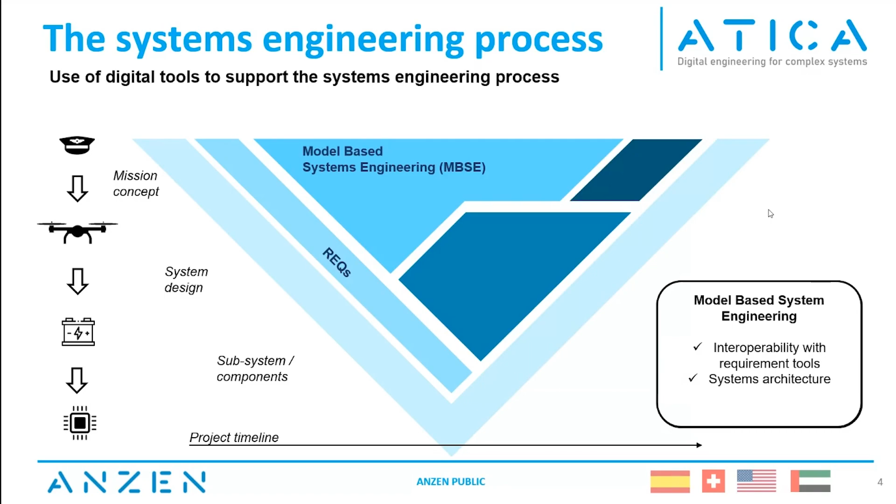And in the last few years, and of course, if you are here with Capella, you are already familiar with these frameworks. But what we will want is to link the requirements with system architectures and to develop these system architectures in the model-based system engineering tools in order to find new requirements that are applicable at lower layers of our system engineering process. At some points, the model might be so detailed that it can support simulation, and also in some cases, more advanced analysis or even code generation.

In this case, we are talking about model-based design. There are specific tools for that, and sometimes it could be also interconnected with model-based system engineering. In some cases, these models are so detailed that they can support what is now called digital twin, a virtual representation of the system that represents from, let's say, different points of view, the behavior of the final system that we are developing in the projects.

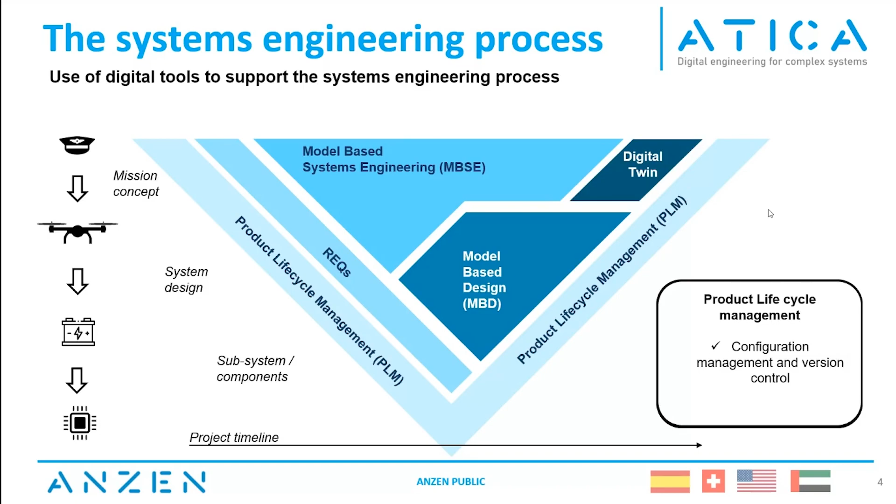And all these tools and methods and tasks are supported by other tools that are used to just manage interactions between the different frameworks, and in particular manage versions or control the development process of these very complex products.

So our vision in Anzen is to put model-based safety analysis as an additional tool in the middle of all these ones, with the main idea of centralizing information, being able to share safety-related information across the different disciplines that we have presented just before, and being able also to make analysis as smooth as possible, in some cases even automatic, if we have, let's say, the correct tools and the correct source of information all interconnected. So this is the vision that we are seeing in Anzen, and this is what keeps us working all the time.

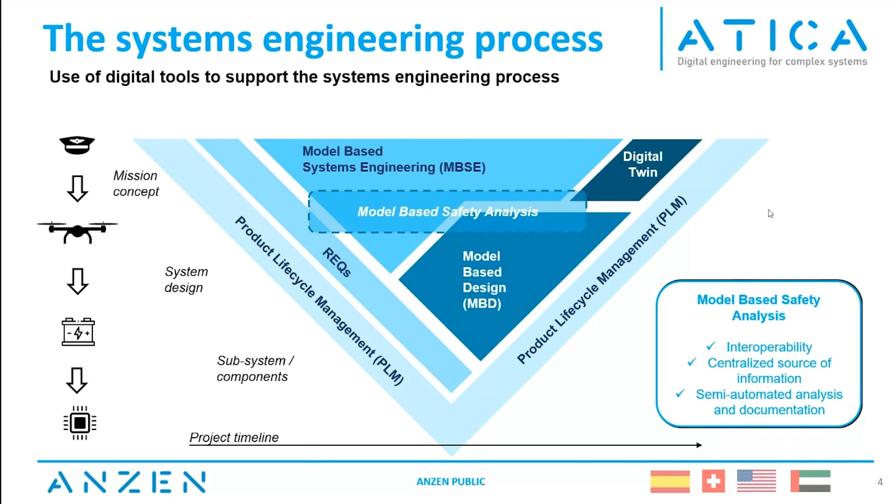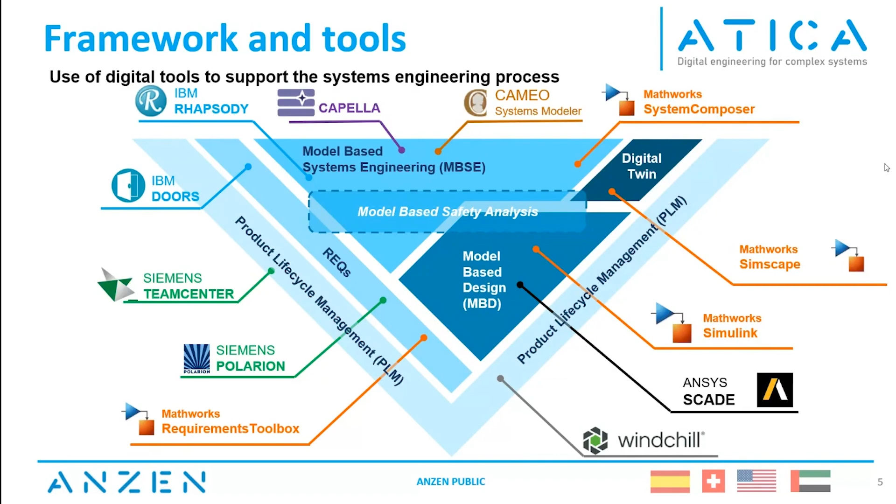We want this model-based safety analysis to be a sort of transversal tool that benefits all these engineering disciplines all over the product lifecycle. So just to present with a little bit more detail what we are talking about, I have put together this slide with different tools that you might be using already. Of course, there is Capella, which is the main one and the one that we will be talking more about today. But our idea is that ATICA is not something that is constrained to Capella, but rather transversal and could benefit all the different disciplines.

So our vision is to develop safety extensions that allow us to manage safety-related information. When I say safety, I mean safety and dependability, or safety, availability, reliability, and maintainability. Everything that is around, let's say, the correct functioning of a system and the mitigation of failures in case they occur. So we want ATICA to be able to interoperate with requirement management tools in order to have specific safety requirement libraries for complex products.

We want ATICA to be compatible with model-based system engineering, and this is the main focus of today, ATICA model-based safety analysis. We want ATICA as well to be compatible with model-based design tools, and in particular, we found very interesting applications in automatic systems and systems that are capable to detect failures and reconfigure by themselves. And we want ATICA, of course, to be compatible with digital twins in the future.

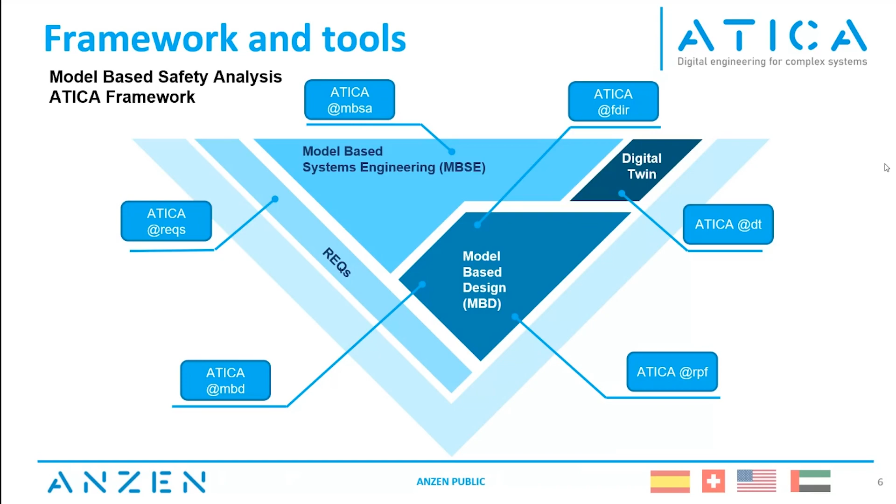So being able to create a framework that allows us to introduce failures into very complex virtual representations of systems and evaluate contingency scenarios and response of the system against failures. But this is more like the long-term vision. Today, we are talking about ATICA model-based safety analysis, and in particular, ATICA for Capella. We have other developments ongoing. In particular, we are trying to couple with other tools that are widely used in the industry. But today, we will focus on ATICA for Capella.

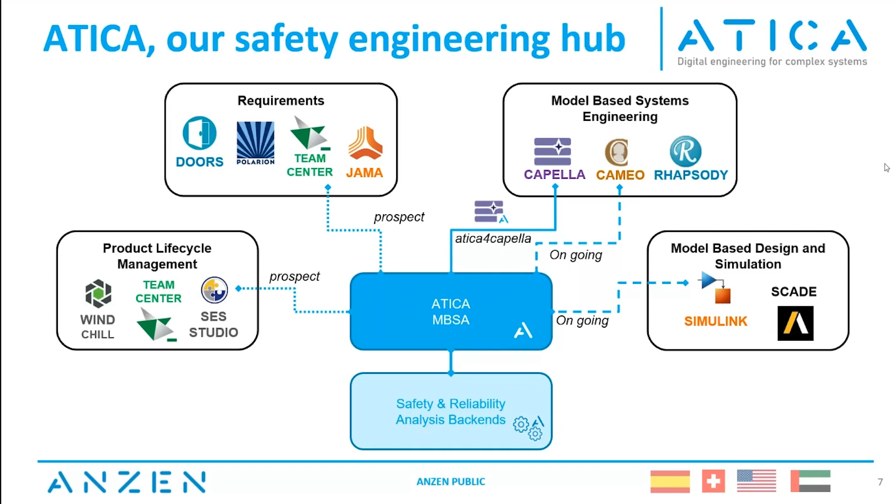So after this brief presentation with the main ideas of our vision, let's jump now into ATICA for Capella, and more importantly, what does this add-on do? So in this slide, I'm going to break down the system engineering process into three main perspectives. One is requirements. The other one is model-based system engineering, which will be supported by the Arcadia methodology. And the third one is the model-based safety analysis, in this case supported by the ATICA framework that we are developing.

So it all starts with an idea of a mission, or what we call stakeholder needs. Somebody wants a system to do something. Let's picture that we have an aircraft here.

The mission is to move people from A to B or something like that. And from this need, we are going to develop different layers of analysis, starting from operational analysis, and then this will help identifying functional requirements and eventually building our system analysis with all the system architecture. These concepts are very general, and if you're familiar with Capella, of course, you already know.

What we want is to have a third perspective, which is the model-based safety analysis, that is going to take information from operational analysis in order to identify under which framework this system should be certified. If you are familiar with the aeronautic industry, you will easily recognize here the EASA rules, CS23 or CS25, or now in the advanced air mobility field, we are talking about the SORA analysis. So these kinds of regulations tell you what your system needs to comply with in order to be allowed to fly in specific circumstances. So it's very linked to operational analysis.

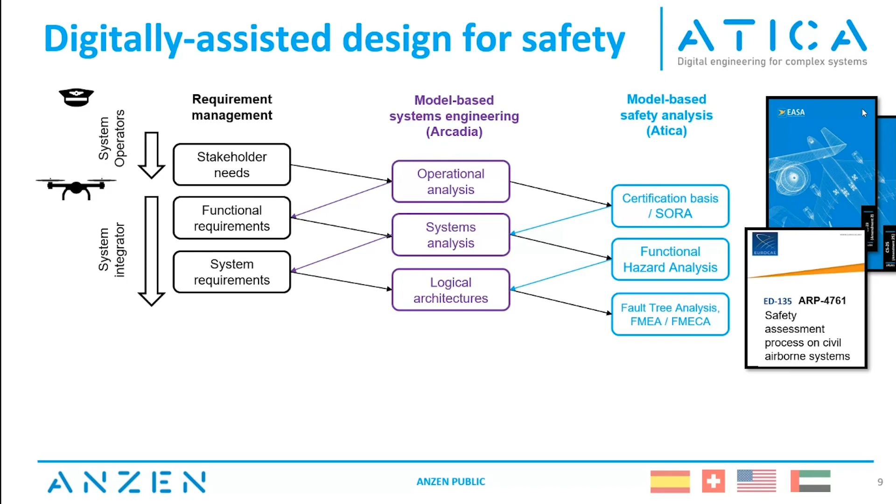Breaking down the system into more detailed, let's say, subsystems or components, we are going to find eventually our logical architectures, and we are going to have, from the model-based safety analysis perspective, the conventional analysis, so typically fault tree analysis, FMEA and FMECA. And in particular, in the aeronautic industry, we are doing this analysis following the ARP 4761 regulation. This could also be tailored eventually to other frameworks, in particular automotive with their ISO regulation, or in space, the ECSS. This is something that we are looking forward to doing in the future. For now, what we are covering is the regulation of the aeronautic industry.

And continuing with a more detailed view of our system, we can break down the logical architectures and finish with what we call physical architecture in Arcadia, which is also sometimes called implementation. So the view that presents already the physical system. When I say physical, I mean sometimes there is physical hardware, but sometimes there is also the software part. But it represents really the implementation of the system, how the system will be built in order to meet the system analysis prescription and the operational analysis that have been identified before.

And here in the model-based safety analysis, since we already have a detailed representation of our system and we know which subsystems, which components we are using in the system, we can finish, let's say, our process with the reliability prediction. So this time we have not only generic functional components, but physical components that sometimes have their own failure rates, and that we can propagate depending on the architectures and find the overall reliability of the system.

So this layer on the right, certification, functional hazard analysis, fault tree analysis, reliability, what we want with the model-based safety analysis framework is to have, let's say, an interconnected or holistic view that allows us to share information from one layer to another, and more importantly, couple this information with the system information that is already covered in the Arcadia methodology, in the model-based system engineering tool.

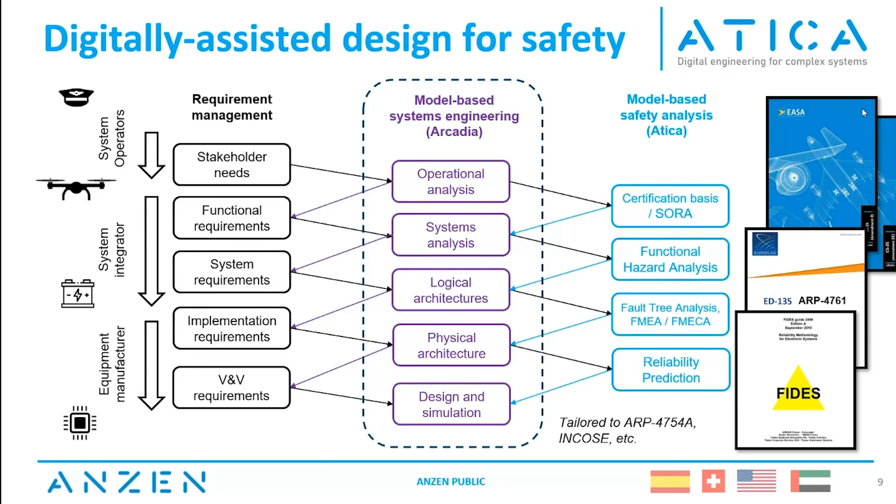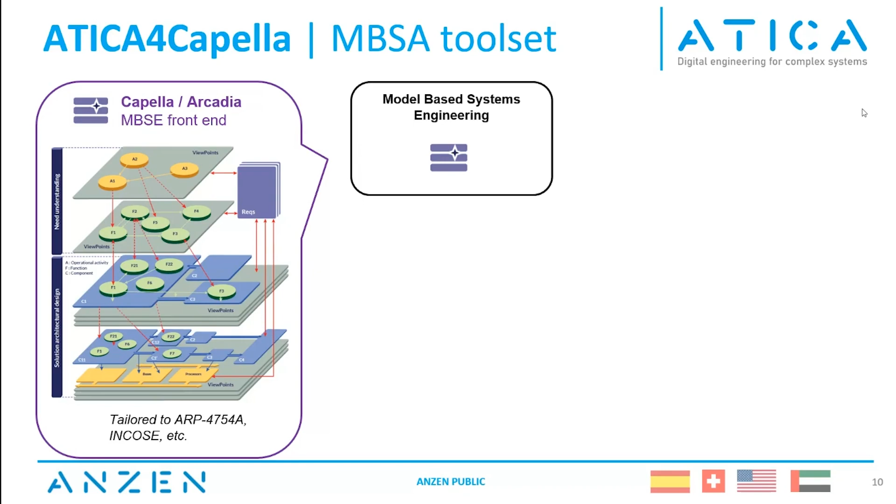So now, how is this implemented in Capella? We have Capella as the main tool for doing the system engineering process, and we have an extension, an add-on that brings two additional layers. One is a viewpoint, which allows including new models into the system. You will see it in just a couple of slides, our safety meta model and the new objects that are included in this model. And then we have the safety and reliability analysis backends.

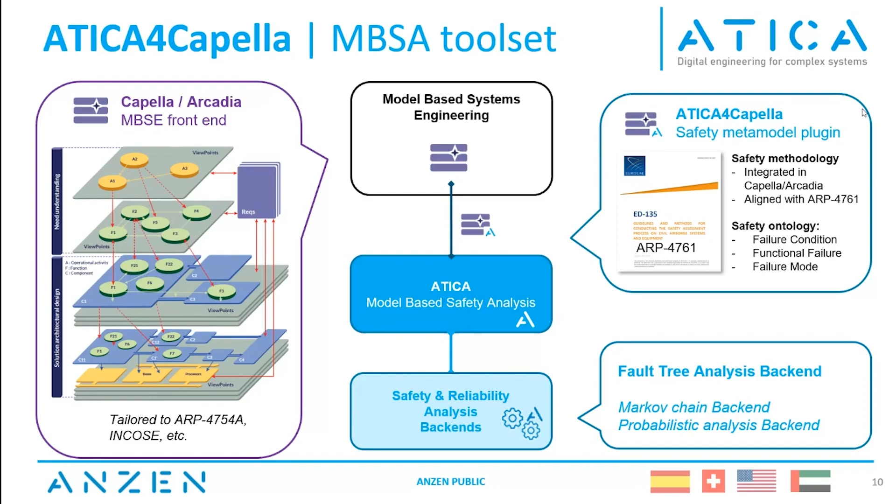This is something that runs outside of Capella, but connected, which interprets the system model, propagates failures and eventually does the kinds of analysis that are needed, like fault tree analysis or Markov chains or probabilistic analysis. This is work ongoing. We are implementing this little by little, but I'm looking forward to presenting to you the main functionalities that we cover so far.

So just to give a brief presentation of the add-on, ATICA for Capella. For now, it's working mainly for Capella 6 and Capella 6.1. We started the development directly in Capella 6. After some feedback from different users, we saw that it was also important to cover Capella 5.2. So right now, if you try to download it, you will have the option to download the version for 5.2 or the version that covers Capella 6 and 6.1.

We have not decided yet if we will continue covering both versions. We will try to merge as soon as possible. But for now, just for the users that want to have a first insight into the tool, both versions are available. We are also trying to make ATICA for Capella as compatible as possible with other add-ons. We have already successfully tested the requirement viewpoint and the document generation add-on M2Doc.

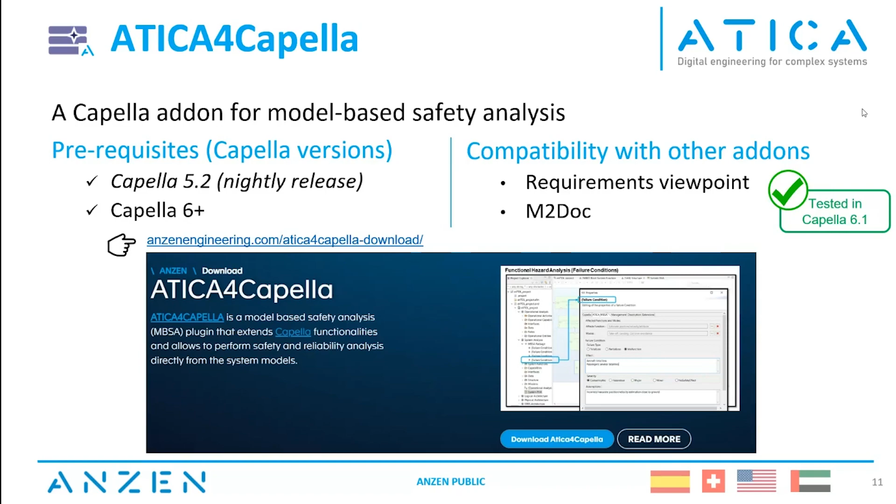So now a few words about the safety meta model and the new objects that we are introducing. So you are familiar with the Arcadia methodology, and you know already that systems can contain system functions. The new element that we are bringing is failure condition, which is an element that could be linked to a system function and that is used to describe which will be the effect in case the system function fails and what will be the severity of that failure. So this allows to classify the system functions by layers of severity, and we will see afterwards how this will be important in lower layers of the analysis.

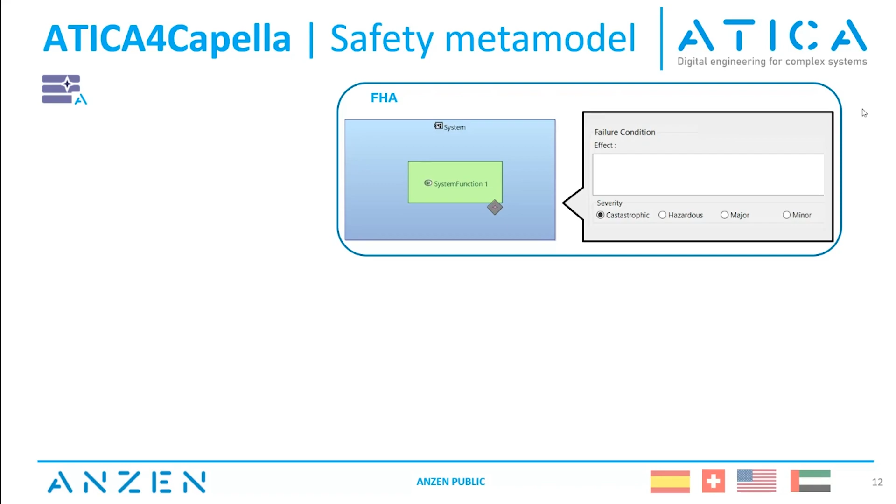Thanks to this new object, failure condition, and the interrelationship between system function and failure condition, we are able to do the functional hazard analysis, the first one of the analysis that we want to cover with model-based safety analysis. Then, in the Arcadia methodology, system functions can be derived into logical functions, and this logical function will have also a failure representation. In this case, we call it functional failure. And it also has its own properties in order to define the consequences of these failures.

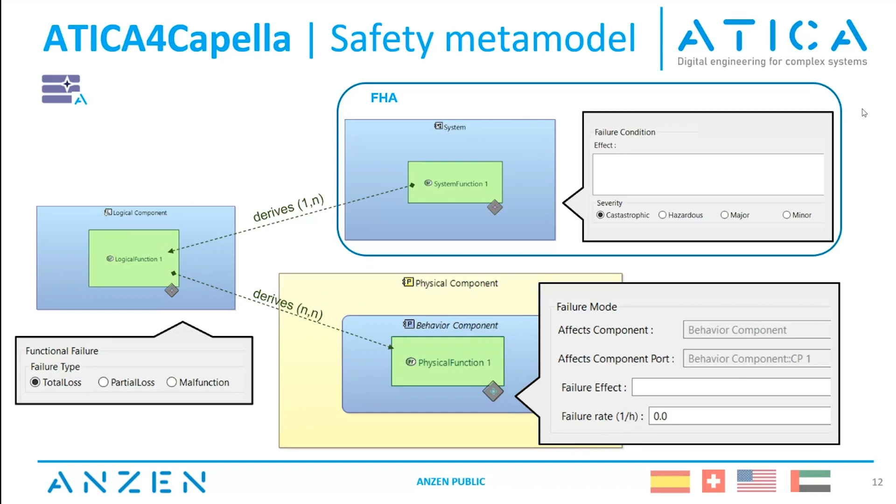And again, at physical level, we are doing the same. So we are linking a new object, failure mode, to the behavior component and also to the physical function in order to have full traceability of failures and being able to describe from the safety perspective the same way that we are doing in system engineering, so breaking down system into logical and then into physical. We will be able to break down a failure condition into multiple functional failures and eventually into multiple failure modes. So this helps us doing top-down analysis, such as the fault tree analysis.

The fault tree, for those who are not familiar, is used to see which will be the effect of a failure at higher levels of our system. So for instance, we have a failure condition. We have identified that losing this system function is catastrophic. Then we will see which are the different triggers that could affect this failure. And we can verify the probabilities of occurrence of these failures at higher level, at system function level.

And we can also do functional failure modes and effect criticality analysis, FMECA, or the summary of these failure modes, which is FMES. So this is more a bottom-up approach. We start from the component. We define the different failure modes that affect the component, and we move this element to the higher levels of logical and system in order to assess the criticality of these elements.

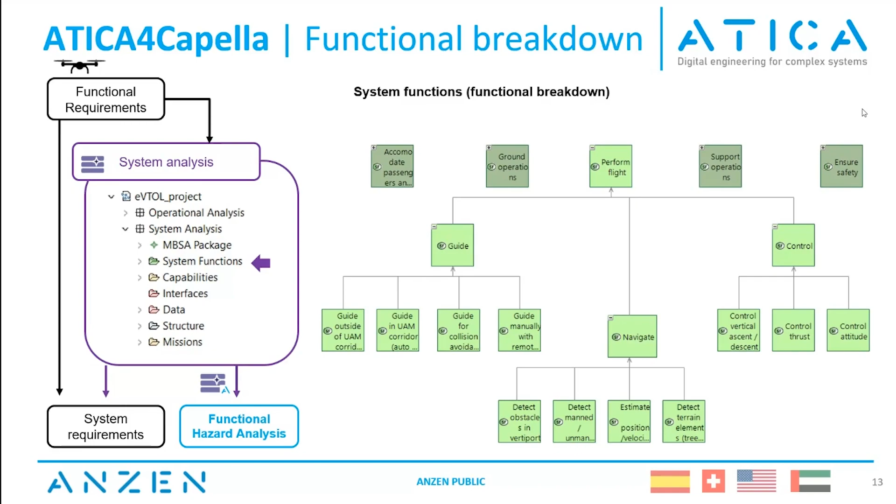So in order to run the model-based safety analysis, we need to start with a functional breakdown of our system, like the one you are seeing now in the slide. Just to present one functionality that I found very useful in combination with the generation of documentation is the option to create templates that generate automatic documentation from the model. We are implementing all these features because we have seen that most of our users really appreciate this possibility. So yes, we will dig a little bit deeper into this later on, but we are trying to do as much as possible, having the diagrams and then a template that allows to create the documentation directly from the different diagrams.

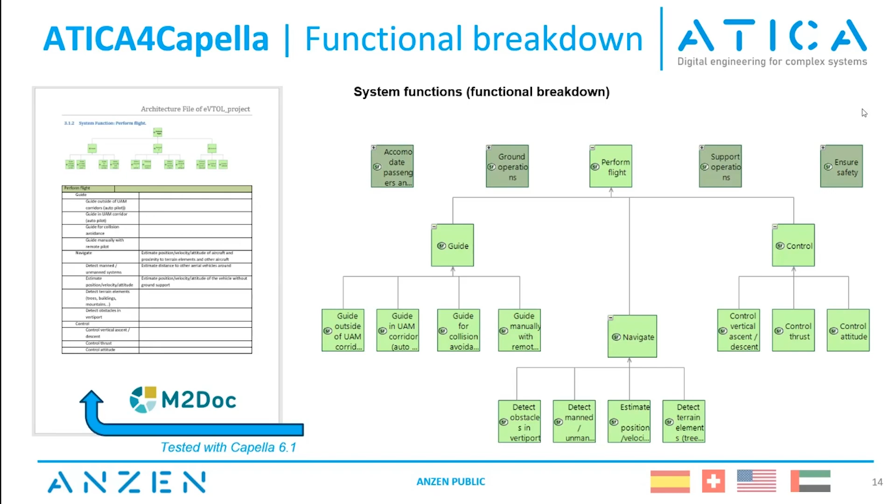So as I was saying, we start from the functional decomposition of the system, either in the functional breakdown or in a system architecture diagram. We create functional chains. Functional chains are important from the safety point of view because they allow us to identify what will be the effect of a failure and how it will propagate through the system.

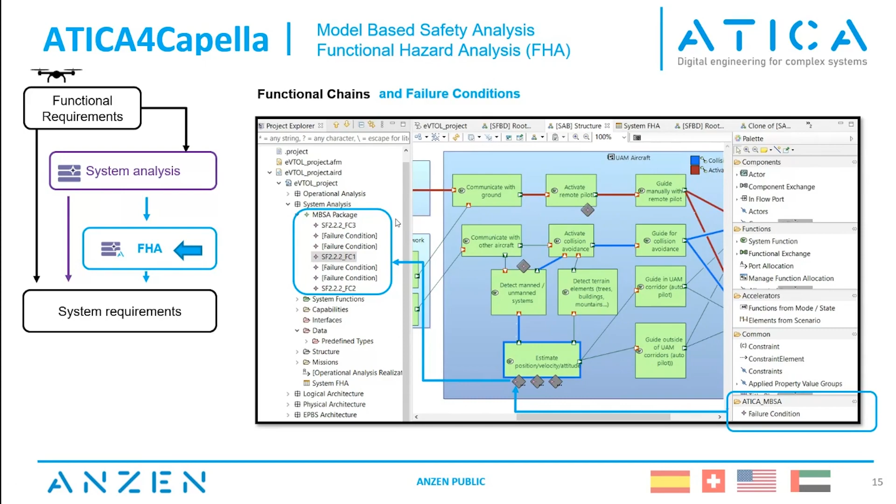And now, with our ATICA capabilities, we are able to define failure conditions. You see here on the right-hand side the failure condition element that could be linked to a system function, and then it's created automatically in the model tree, similarly to all the other elements that we have already in the Capella toolset. And then this failure condition has this dialog box that allows to bring more features and more information to the failure condition.

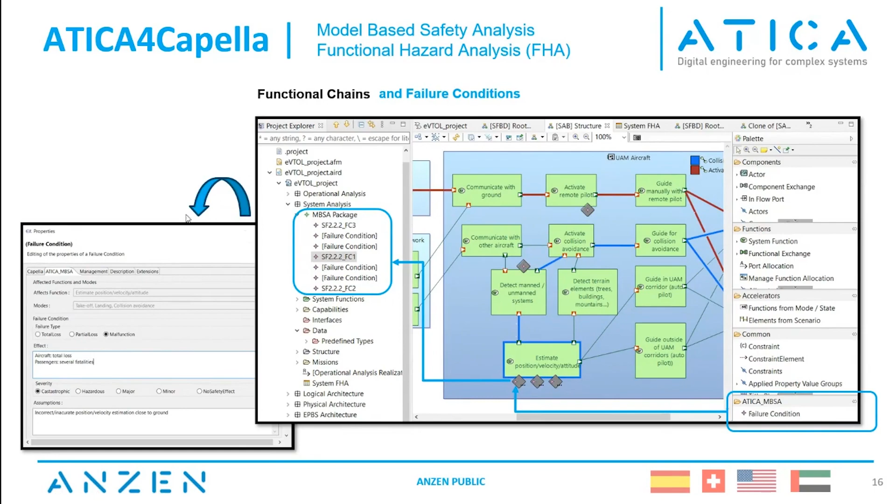We will see it later with a specific example, and more importantly, with a live demonstration with the Capella tool. And after we have defined a lot of these failure conditions and we have associated these failure conditions to our system functions, we can do the functional hazard analysis, which looks like this. It's a sort of table that classifies the failure conditions and summarizes the main features of this in an organized way, in a structured way.

In this case, we are following exactly the prescriptions of the ARP 4761, which classifies failure conditions first by the function which is affected, here in the green box, and then defines different features such as the flight phase in which this failure condition occurs, the effects of the failure condition, the severity classification, very importantly, because this is going to help setting quantitative requirements into our safety analysis, and then other fields to describe with more detail the failure condition itself.

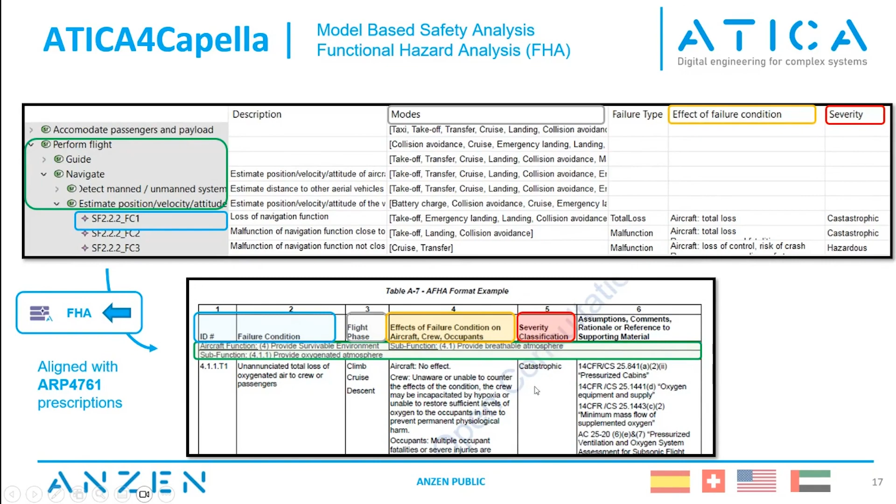And as I was saying before, we are always trying to be able to provide the functionality of generating documentation. So we have specific templates for this. And in combination with the M2Doc tool, we are able to generate, in this case, a Word representation of the functional hazard analysis.

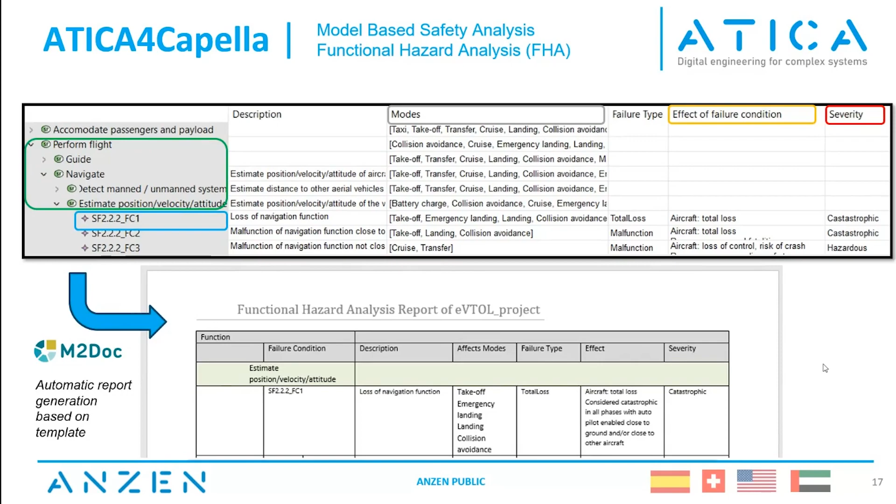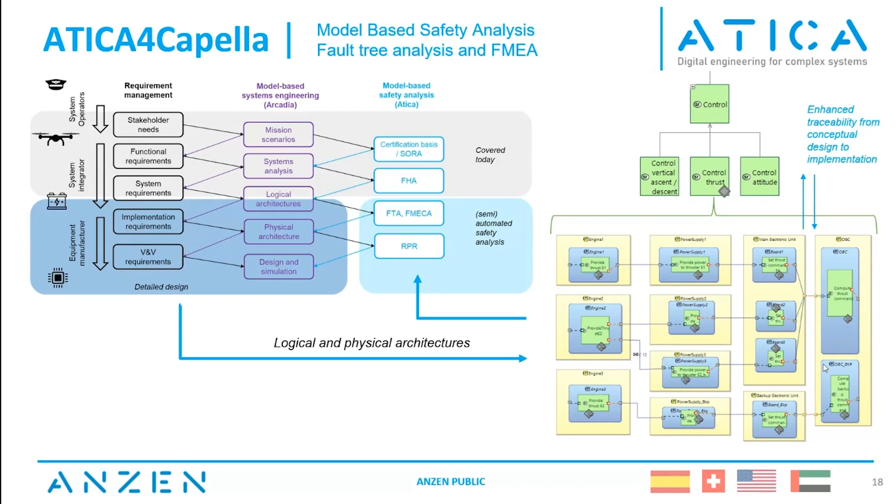This we will not cover today, but I want just to give you a little introduction to what's coming next. We have a plan to also implement the safety analysis at lower levels of our system analysis, in particular logical architecture and physical architecture, to be able to cover fault tree analysis and FMEA. But I will save this for later on. Let's now jump into a use case example.

In this case, we are going to do just a preliminary analysis of a system, an electrical vertical takeoff and landing vehicle. So we start, as we said before, with the stakeholder needs. In this case, there is someone that wants a vehicle to be autonomous, to fly with 4 passengers, to do vertical takeoff and landing, probably because they want to operate around cities. So it's quite convenient that it can take off and land vertically.

It's going to be moving around cities, and it's going to have, just to put some numerical requirements, a range and an autonomy. We need to know that there is some regulation about this kind of systems. For now, this regulation is under construction, but we already have some preliminary concept of operations that could be used as an input to develop our system analysis.

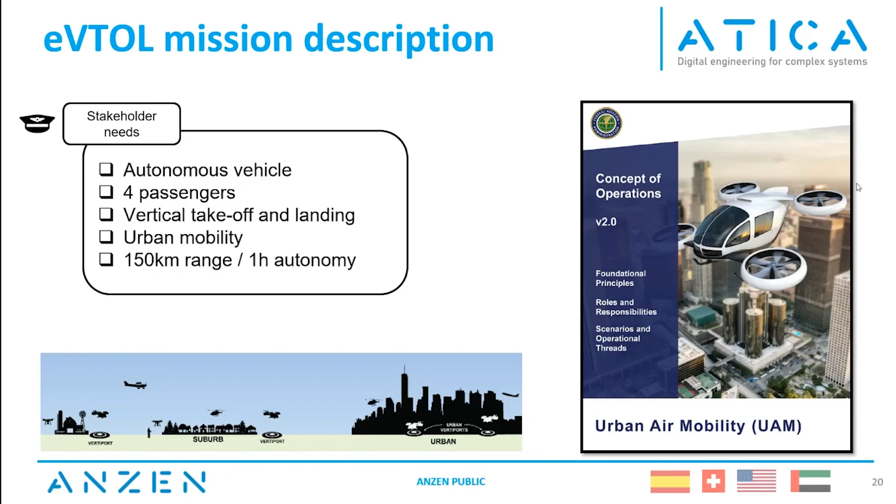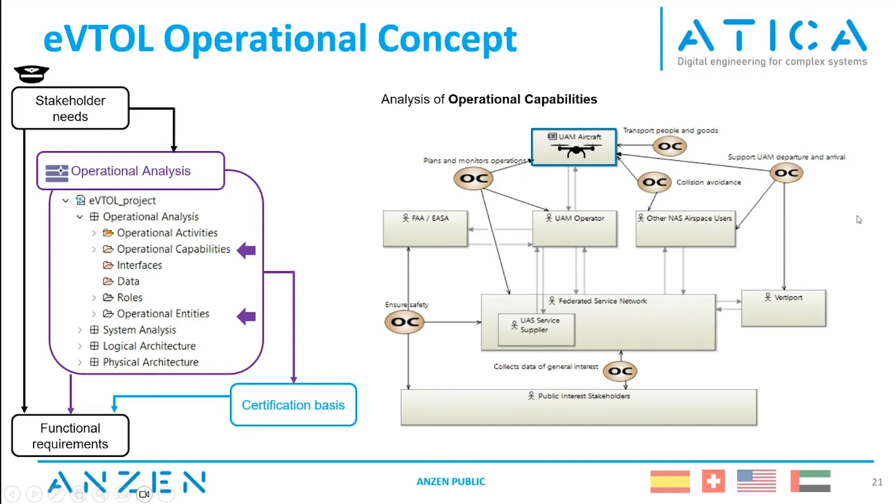So following the Arcadia methodology, we start the operational analysis by identifying the stakeholders that participate in our system, and more importantly, how our system of interest, in this case the vehicle, is interacting with other systems, which capabilities our system provides, and which of these capabilities also need the participation of one of the stakeholders. I'm not going to go into detail, but just to set the scene for what's coming next, we have our system of interest, our vertical takeoff and landing vehicle.

We define 2 main missions for it, the transportation of people and goods, and then, of course, ensuring safety. And we break down these missions into multiple capabilities, such as emergency landing or collision avoidance from a safety point of view. And for the transportation feature, we decided that we will need capabilities such as autonomous flight, communication with ground, and vertical takeoff and landing.

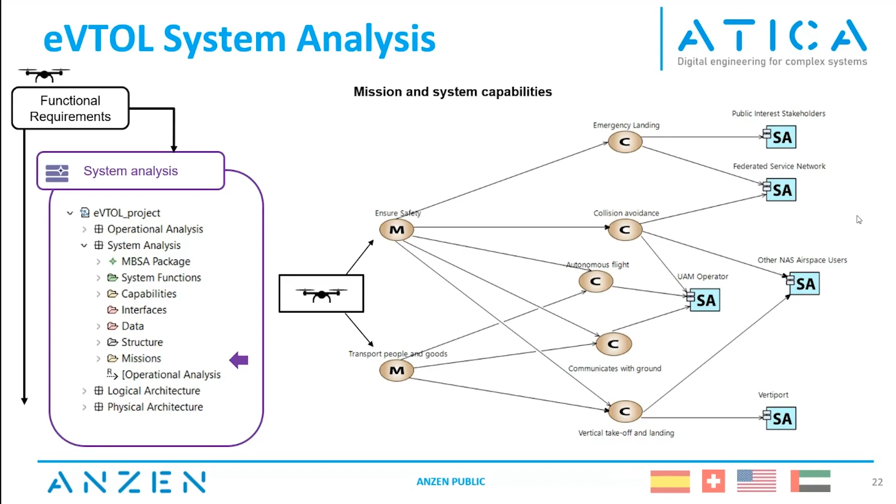And we need some stakeholders involved in the loop. In this case, you see, for instance, for emergency landing, probably we need support from the police or the firefighters. For the communication with ground, we need some ground infrastructure that also sends messages to other operators of the airspace. So all this is defined in the operational analysis, and then with more detail in the system analysis.

We can define a mode diagram. In this case, we represented in gray and blue the nominal modes of the system. So this system can be on ground, which is the taxi phase, can charge batteries, and eventually can take off. From taking off to finding the route that it is going to follow to reach destination, there is a transfer phase, which is mainly the ascent phase.

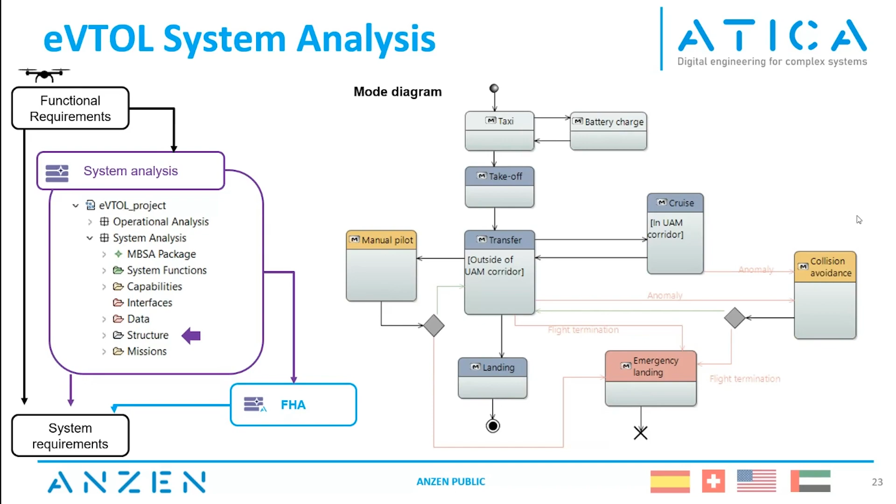Eventually, it's going to join an urban air mobility corridor, which is a sort of street, but defined in the air. It's going to fly there for a few minutes, and then eventually will be close enough to the destination point to take the transfer phase again, and then land at destination. But there are a number of things that could go wrong during this process. And we also have some contingency modes that allow us to take control of the system and do some safety mitigation action that prevents the system from having, let's say, a catastrophic landing on ground.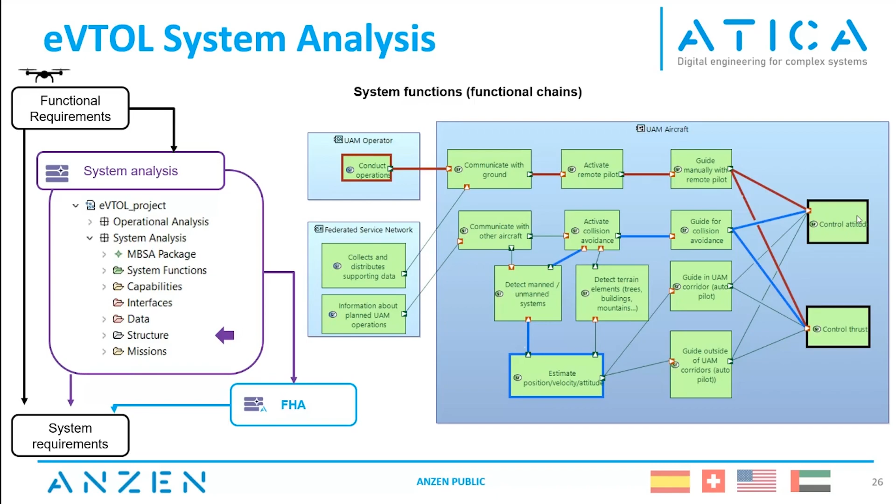We break down these modes into different functions, and we assign which of these functions are active per mode. So we may have nominal functions and other functions that are only active in contingency modes. I like a lot this functional tree representation, but it's also very useful to have the system architecture blank diagram with the different functions interconnected and the functional chains defined in order to identify how information is flowing from function to function in order to provide the capability that is represented by the functional chain.

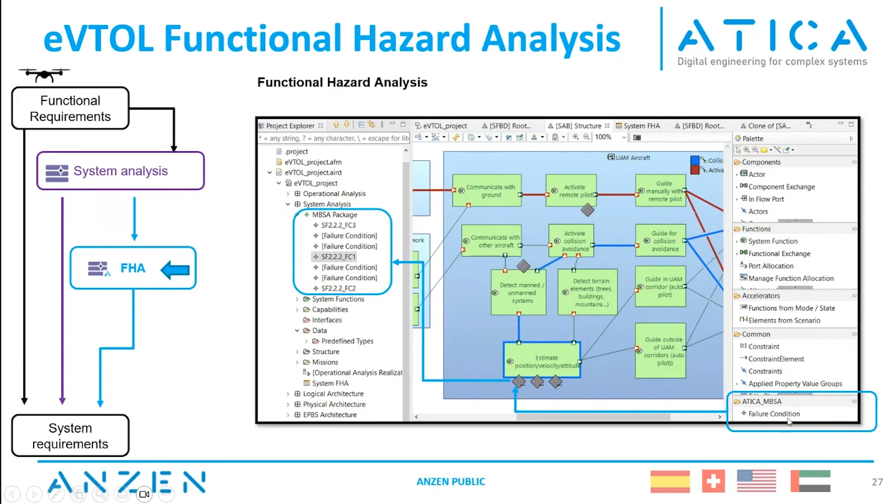So once we have reached this level, we are able now to start using ATICA for Capella, and in particular define our failure conditions. So as we have said before, we have the element failure condition here. We can drag and drop the failure condition to the system function and then start configuring the different fields that are needed in order to define this failure condition.

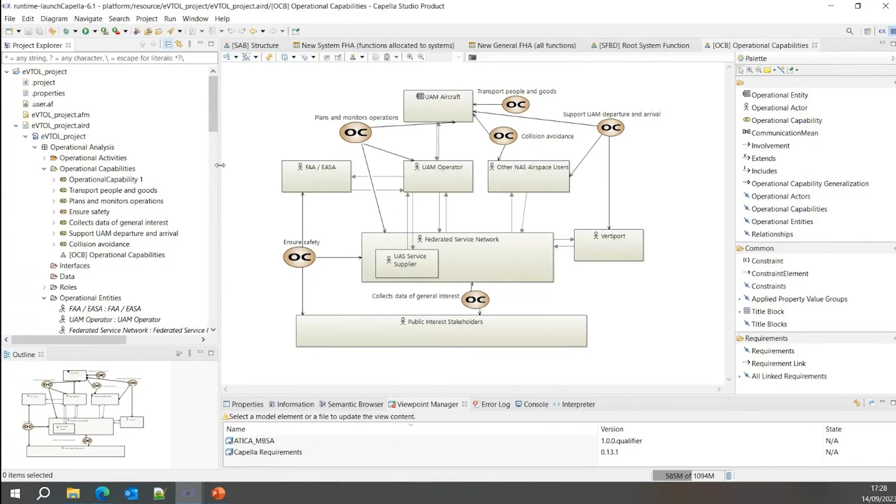So now I'm going to jump into the Capella framework. Now you should be seeing Capella. If you are not seeing Capella, please can somebody make a sign? But if there is no sign, I assume that you are all seeing Capella now. No, I confirm we can see. Thank you, Samuel. So now we see Capella.

We have the different diagrams that we have been talking about before. So I'm going to run a very quick new project just to show how to activate the plugin. But then we will come back to this example and run this example with more detail.

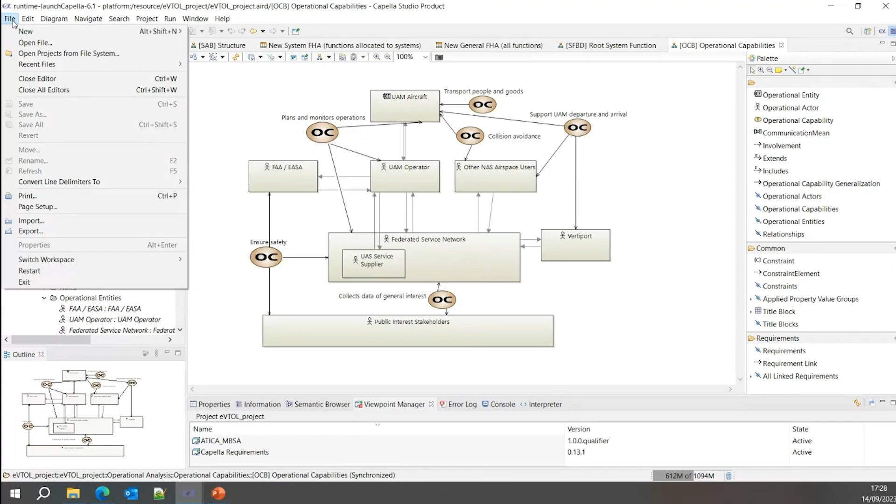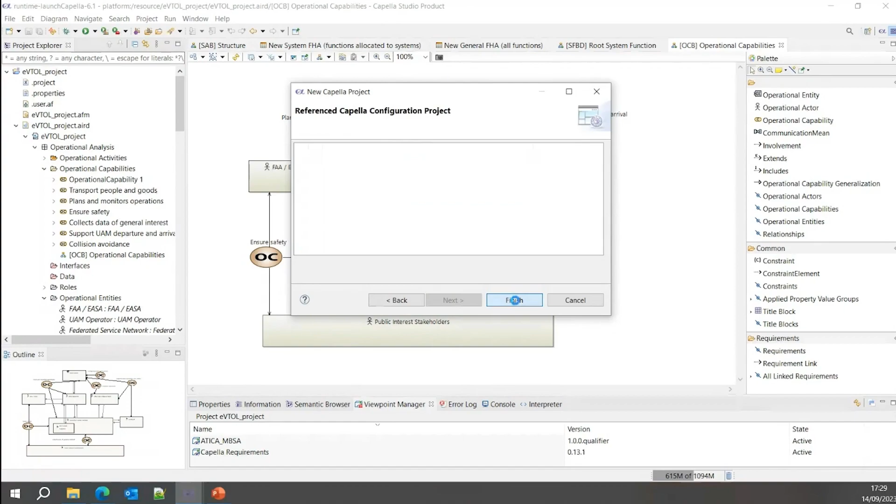So new project. For the sake of the representation, I'm going to call it just test. I'm going to activate all the different analyses. And I'm going to pick all the viewpoints, but not ATICA. You will see after why. I want to show you how to manually activate the plugin in case you have already a model created and you just want to use ATICA in combination with the model that you have already.

So now we need to go to Window, View, Viewpoint Manager. And here in the lower part of the screen, we see ATICA model-based safety analysis. We click on our project and we reference the ATICA MBSA. Now it's referenced. So now we have activated the new features that are present in ATICA.

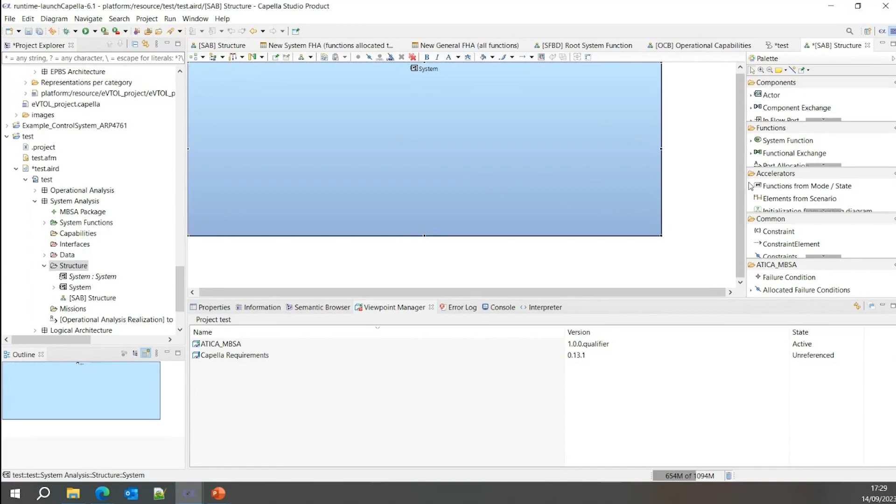The MBSA package appears here. All the different elements that we will create from now on are going to appear under the MBSA package. This way it is a structure in the project tree. I'm going to create a system architecture blank. Okay, now it's created. System, I can create a function. And I can create a failure condition associated to the function. This is a new feature.

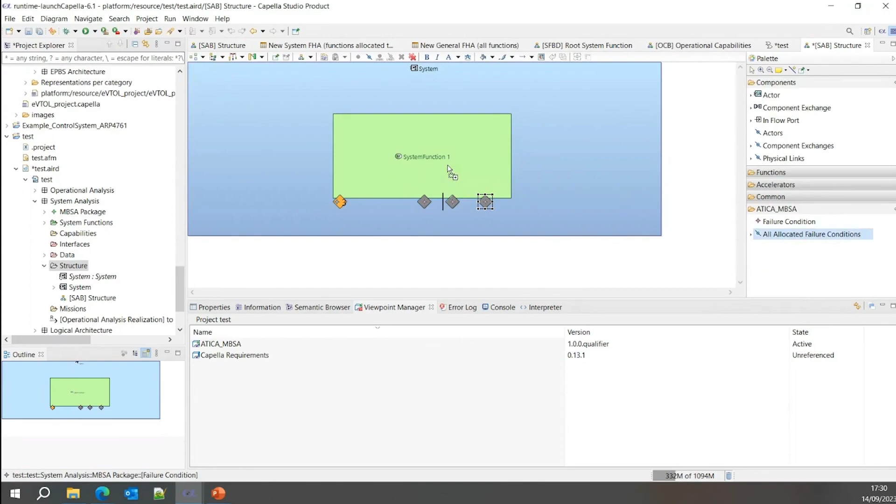It's something that we are consolidating right now, but roughly you have a failure condition and a counter. This is because for convenience, sometimes we may want to see the failure condition, and when there are many, you may prefer to just see the counter. So for now, I can create multiple of them and then pick if I prefer to see only the failure conditions or only the counter or just a few of the failure conditions if needed, similarly to what we are already covering in other parts of the Capella framework.

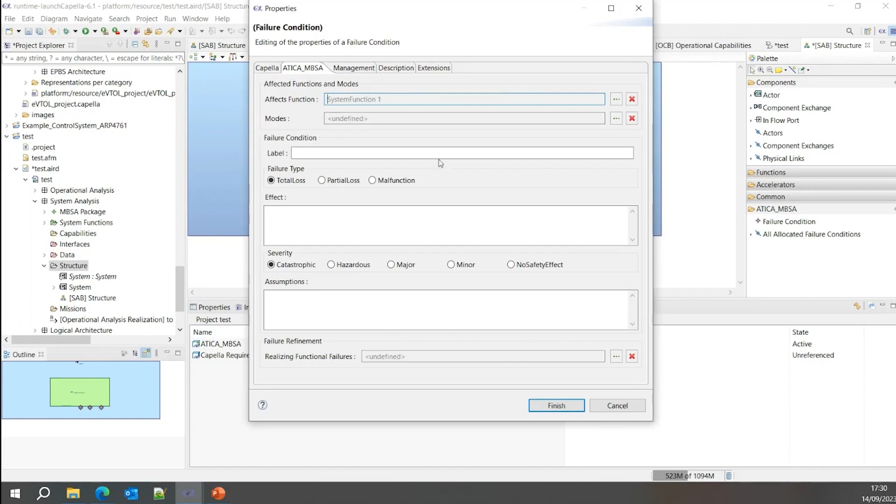We can go one by one to the failure conditions. The screen appears. We can create a name. And we have the different boxes that allow us to configure the failure condition, link it to the system function. This is automatically done because we have dragged and dropped the failure condition into one specific function. We can link it to modes. I'm not going to do it right now because this project is new and I haven't created any mode, but I will show you after in the vertical takeoff and landing example.

And here are different features that could be assigned to the failure condition: total loss, partial loss, malfunction, the severity, assumptions, effects. All of this can be completed manually. One important aspect is that for now, these fields are, let's say, fixed. It is not something that the user will be able to configure easily. We are exploring the option to define some configuration file that allows these fields to be configurable by the user. But for now, these are fixed.

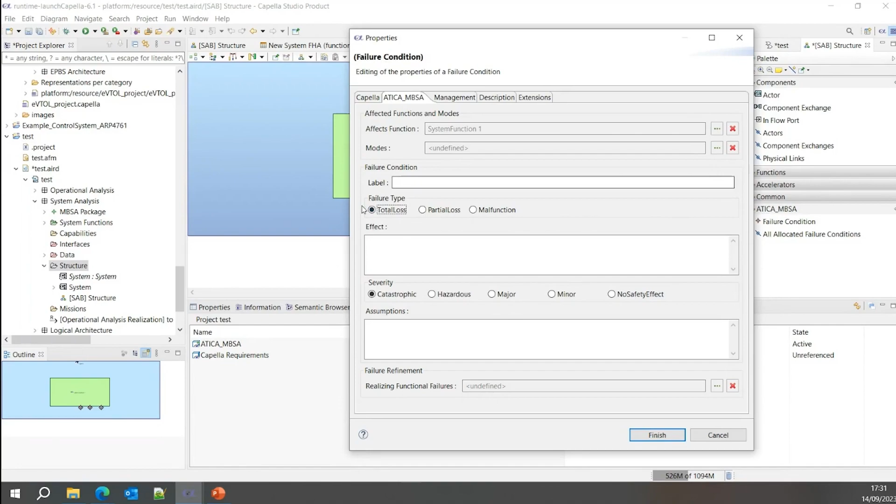So after showing you how to activate the plugin, I'm going to jump back to our vertical takeoff and landing vehicle. So we had our system. I'm going to open the system architecture blank.

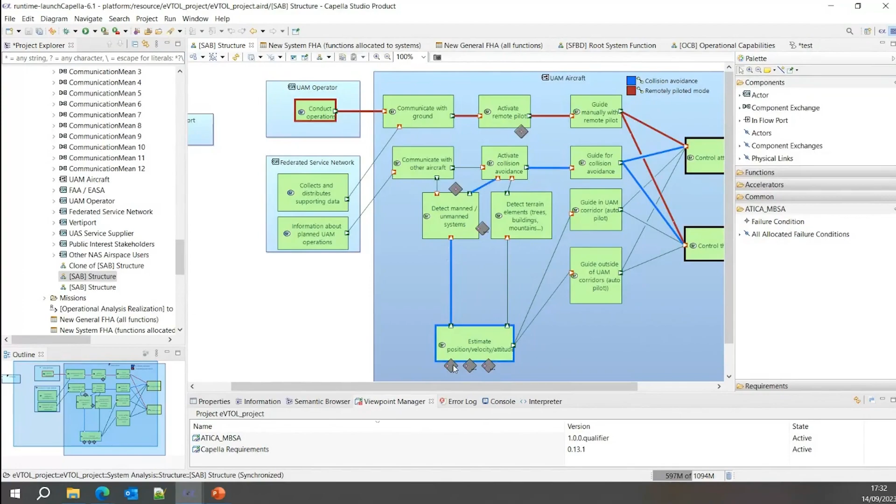So we have our system with functional chains, with multiple functions, with failure conditions associated to the function. It's not complete, but we have already a few failure conditions that have been associated to the different functions. And we can continue populating our system by putting more failure conditions into the functions.

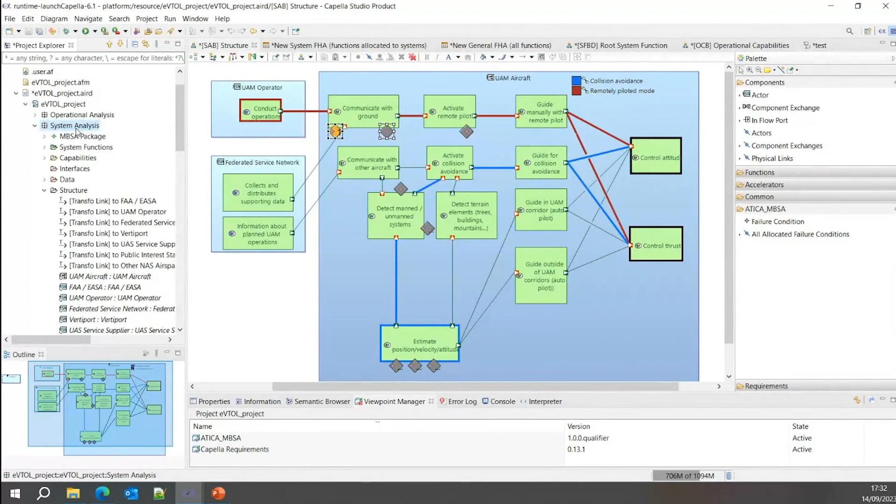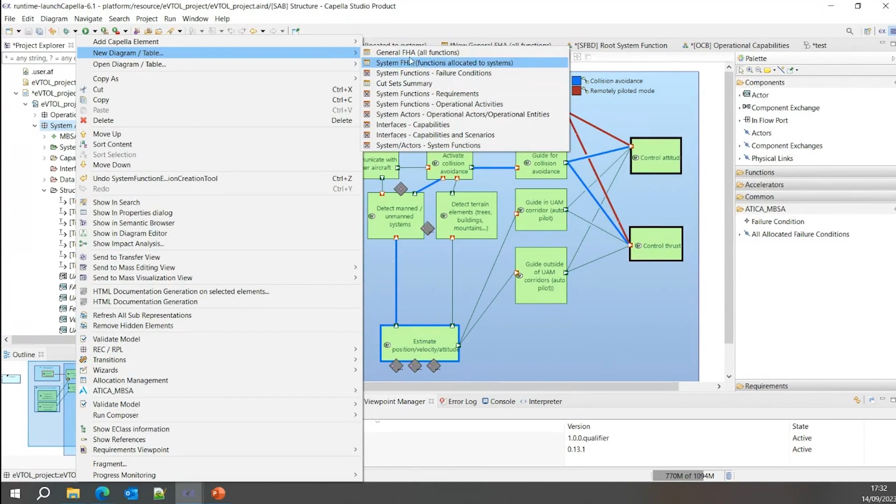Eventually, when the system is complete enough, we can go to the system representation, system analysis, and request the functional hazard analysis. New diagram table, functional hazard analysis. It could be structured either by functions or by systems, in case we have multiple systems. In this case, I'm going to organize it by functions. I can create the new functional hazard analysis.

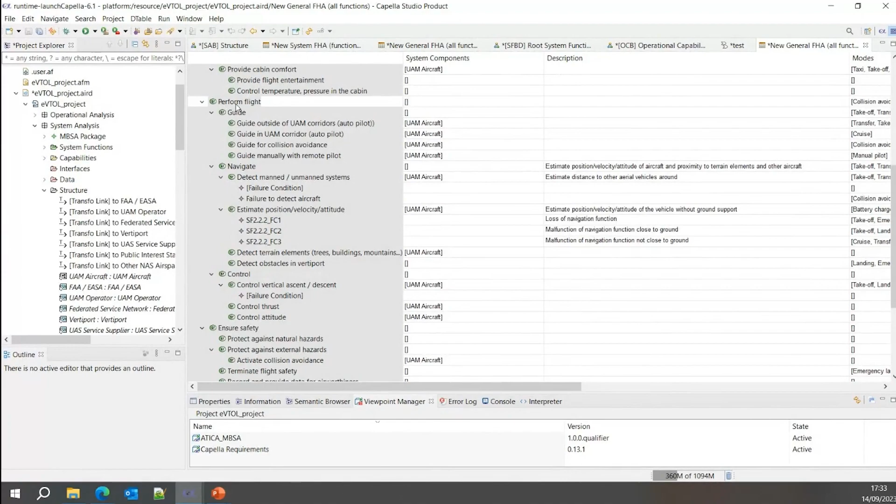And here it appears. We have many, many functions. It could be broken down as a tree. So I'm going to jump to these functions that are a little bit more detailed. So we have perform flight here. We have navigation functions. And inside navigation, we have different functions that we defined in our example with failure conditions associated to them. We have the system component that these functions are affected to.

This is in case we have multiple systems or multiple system agents in our model. In this case, there is only the system of interest, so this is why it's a little bit easier. We have a description field. We have the different modes in which this failure condition affects.

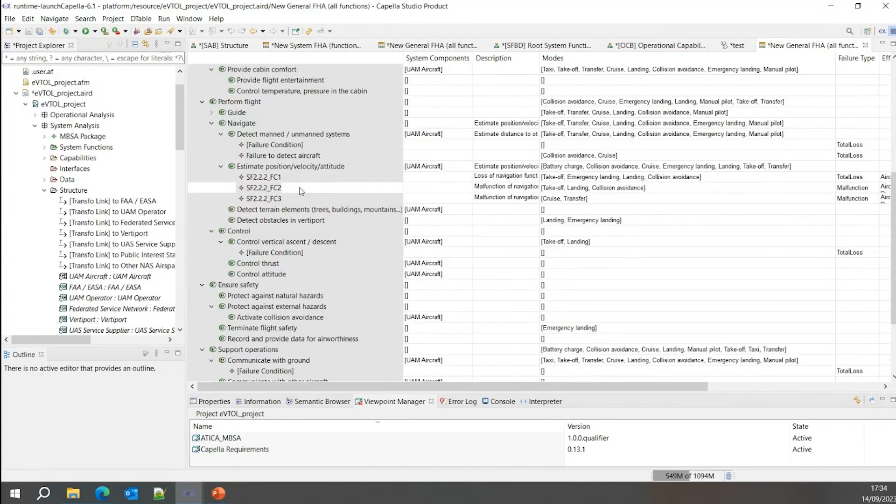This is important because, for instance, losing some particular system function might be critical or not, depending on which mode we are in. It's not the same to lose, for instance, a navigation function when we are landing or when we are in cruise mode, flying at high altitude. So this is why we can configure this in different failure conditions and associate the failure condition to different modes.

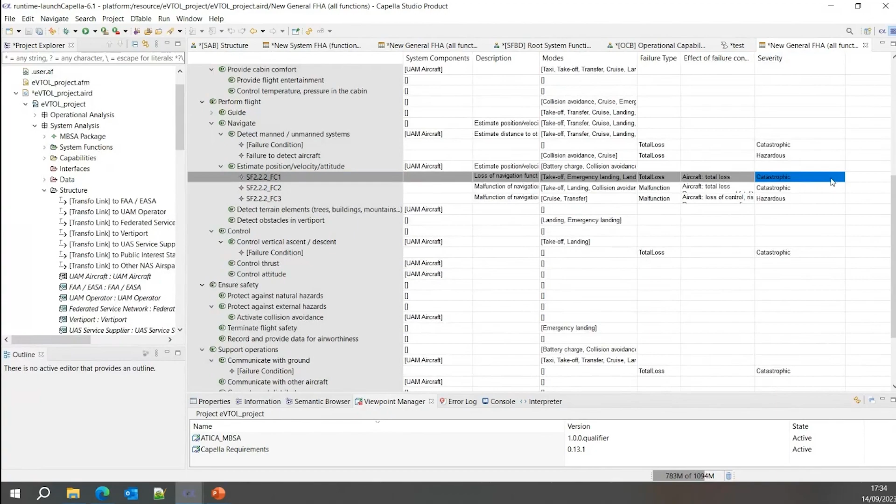We have different failure types as well. It could be total loss, partial loss, malfunction. And we have fields also to describe what will be the effect of the failure condition. And finally, we have the severity of this failure condition, which could be classified between catastrophic, hazardous, major, minor, or no safety effect, which are the classifications recommended by ARP 4761, the aeronautic prescriptions.

I'm going to jump back to the slides. So we have presented the functional hazard analysis. Now I'm going to show you how we defined some templates that allow us to export the documentation and to create a Word document with the same contents. This is something very useful because we can fully customize it using the M2Doc template and then adapt the representation to whatever processes are already being used in the company or to meet specific standards in the way the documentation should be presented.

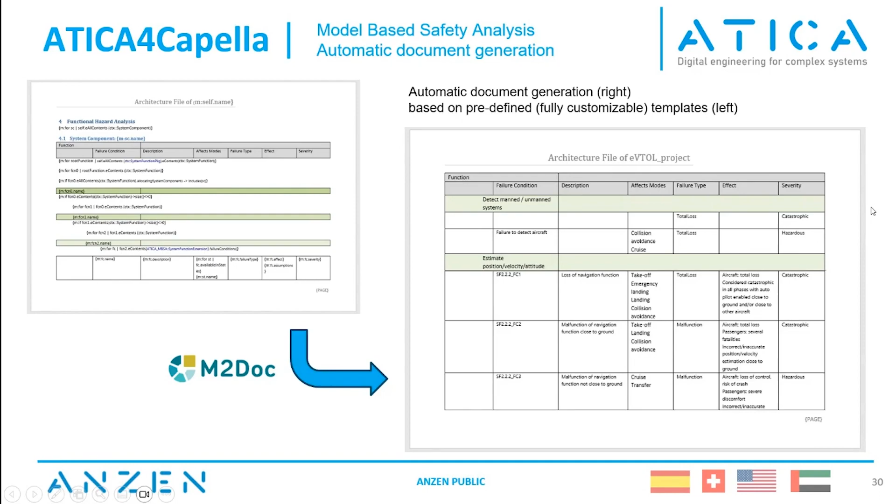So just for the final 5 minutes, I'm going to wrap up this presentation by showing you the next step of what is coming next in this framework to give you a little perspective of the new features that we are implementing and that will be ready pretty soon.

So one of the main concerns that some of our partners and clients have told us is that they have already a lot of information in documents and Excel files, and they are reluctant to do the transition towards model-based. Well, in this case, we are developing specific features to be able to import this documentation and to create the same functionalities that we have seen so far, but back and forth from document to model or from model to document. This way, the work could be shared between the conventional processes for system engineering and the new processes supported by model-based system engineering tools.

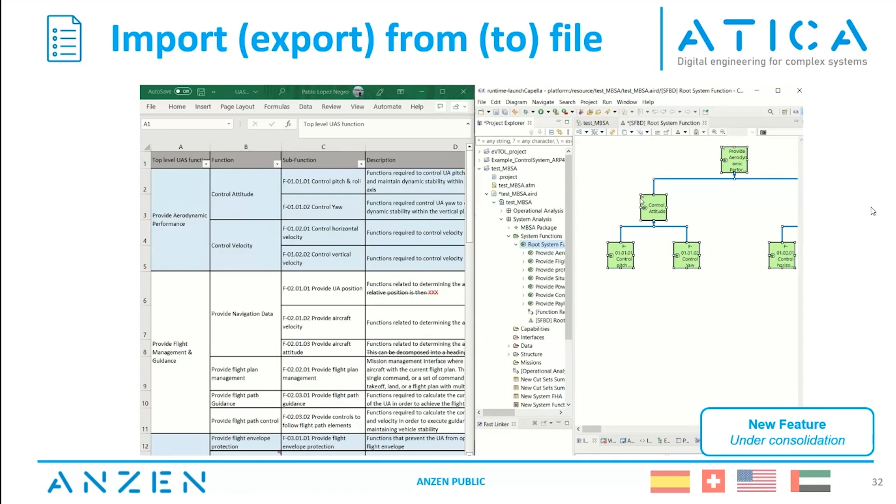So this is an example where we imported a functional decomposition in Excel to a model, and then used this model in combination with ATICA for Capella to define the functional hazard analysis. Another feature that we are very much looking forward to implementing is using the results of the functional hazard analysis to create requirements. Because once we have identified failure conditions and assigned their severity, we can set quantitative requirements into the development of these system functions that are going to be inputs for the activities that come downstream.

So for instance, once we have identified that the failure of a certain function is catastrophic, we may want to implement specific verifications in order to check, for instance, that we have no single point of failure concerning the system function, or that we meet some numerical probability requirement to say that this failure condition is in fact very unlikely to happen.

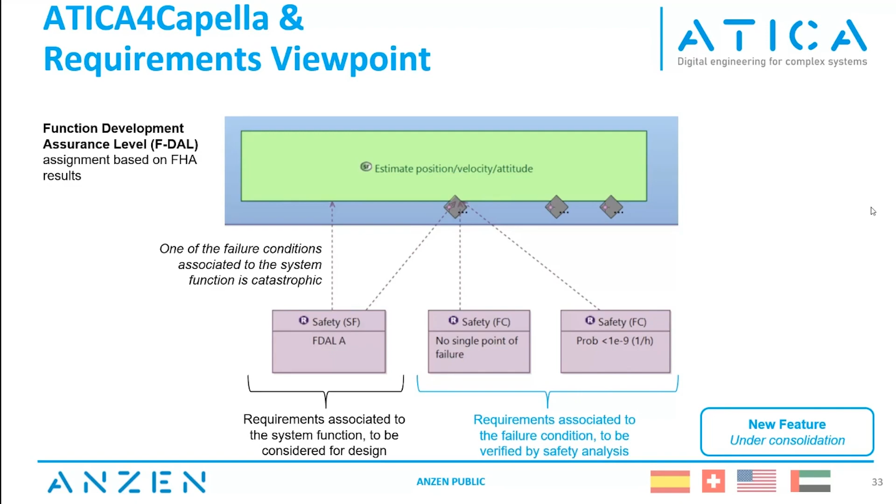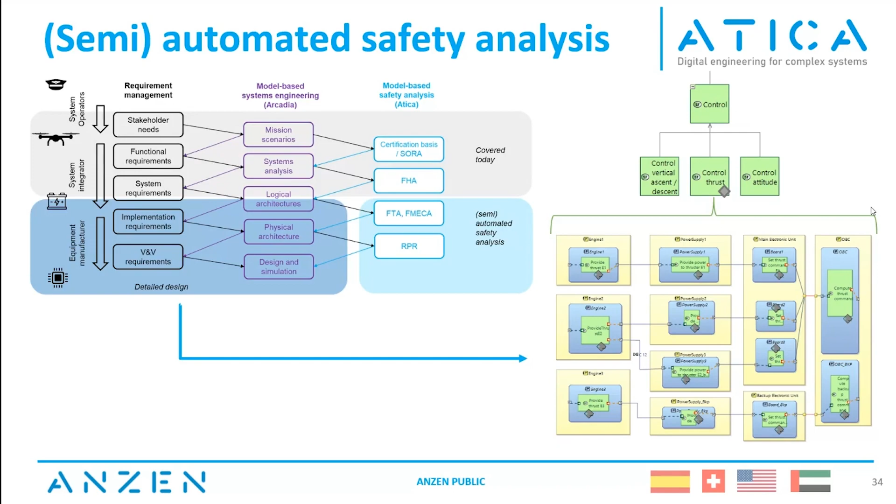So this is something that is going to be consolidated in the coming weeks, and that we are looking forward to implement in the next version of ATICA for Capella. And as we introduced it before, we are also trying to cover functional tree analysis, fault tree analysis, and FMEA in order to provide support to engineers that are working at lower layers of the system engineering process, in particular at logical architecture and physical architecture, and to be able to verify from the models the numerical probabilities of failure and the existence of single points of failure in the system.

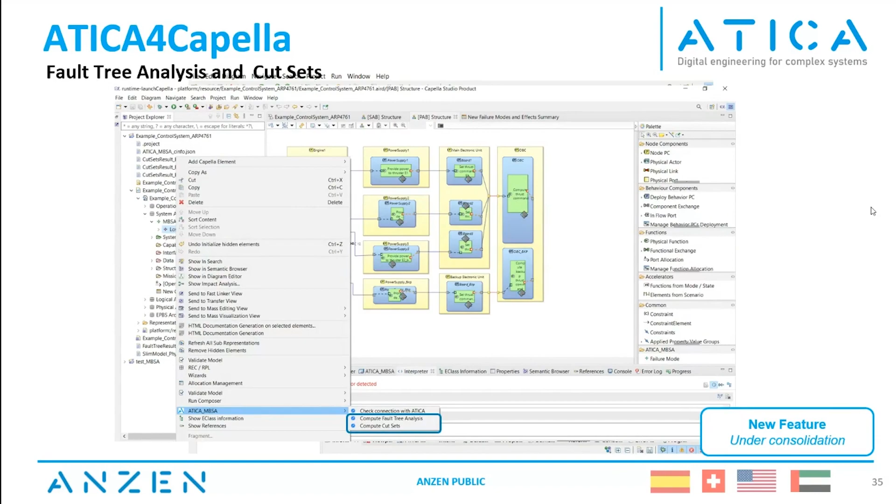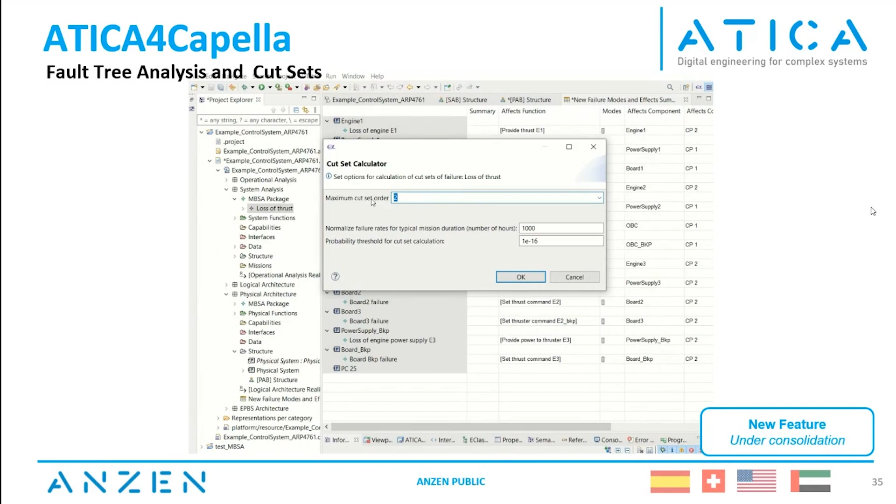So we are implementing specific backends to do the fault propagation. So in fact, now what we have is a model that allows to create failure modes linked to components. We can have a similar representation as the one we have seen before, but this time at physical level. And then run an analysis on the failure condition to verify if our system architecture meets the standards in order to say that our system is safe. So we are doing this through two different backends. One is cut set analysis, and another one is the fault tree analysis. So I'm going to show you just after.

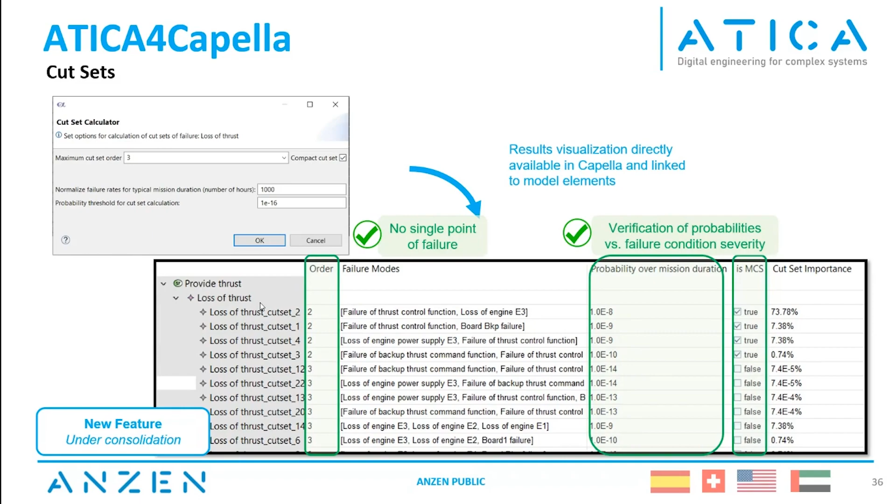And now we can verify that the failure modes with the actual failure rates that are given by the component suppliers or by our reliability analysis, propagate these failures through the architecture in case we have, for instance, functional redundancies or physical redundancies, and finally verify if we are meeting our design criteria.

The other analysis that we are trying to cover is fault tree analysis. We have already a backend that provides a fault tree analysis, but as a sort of results file in the form of an XML, which is not convenient for most engineers. So we are developing a visual representation of this in order to meet the standards that are usually required when presenting fault tree analysis results.

So just to wrap up and to give just a few highlights of today's presentation, ATICA for Capella is an add-on for safety analysis. It's specifically conceived for the aerospace industry, but we will be keen to work with other industries as well and to make it applicable to a wider set of users from different sectors. For now, our main guideline is the ARP 4761, which is the standard of the aeronautic industry. But as I said, we are looking forward to work also with automotive, with railway, with space companies in order to make it as useful as possible to a wider community of users.

The framework can be tailored to meet specific use cases and company policies, in particular in what concerns document generation, as you have seen before.

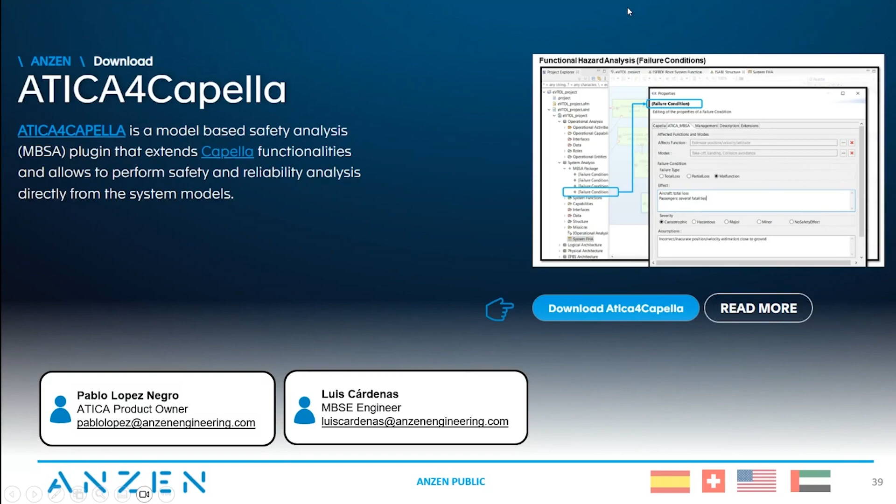Let's see that. So, okay, the first we have is from Patrice. Is it planned to integrate STPA within ATICA?

Yeah, I have to say this is a question that we are getting a lot. I'm not a specialist, but I see that there is an interest in the industry to integrate this kind of analysis. I cannot promise when it will be integrated, but for sure it's something that we need to look at because, as I said, this question is coming right and left. Yes, I cannot promise the date, but it's something that we will very much look forward to do in the coming months. Okay, thanks.

Sorry. There were multiple functional decomposition levels within the system analysis level. How was it determined which function to use for the failure condition identification? Yeah, thank you, Vincent, for this question. It was perhaps not very clear in my presentation.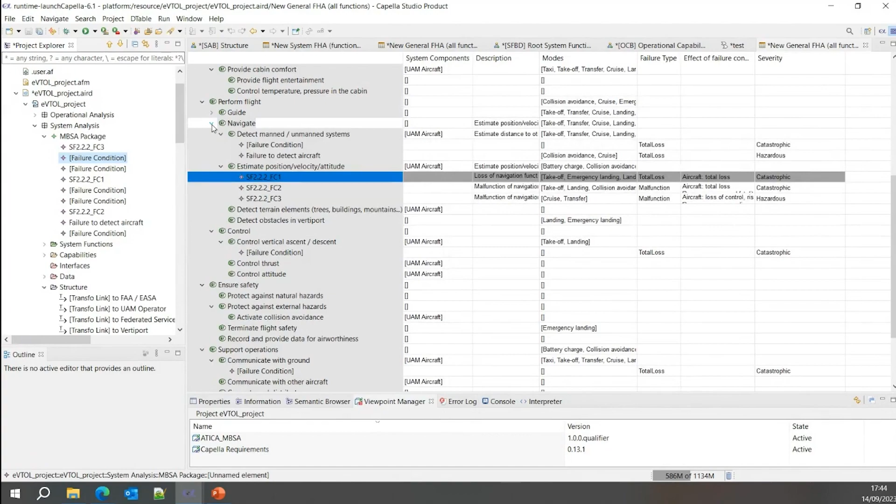So here are, as you said, Vincent, different layers of functions. So you have perform flight, then guide, navigation, control, and then some child function control, vertical ascent, descent. And there is a failure condition associated in this case to this last function, and it appeared just under. If we define the failure condition at control level or at navigate level, it will appear just under the function to which it is associated.

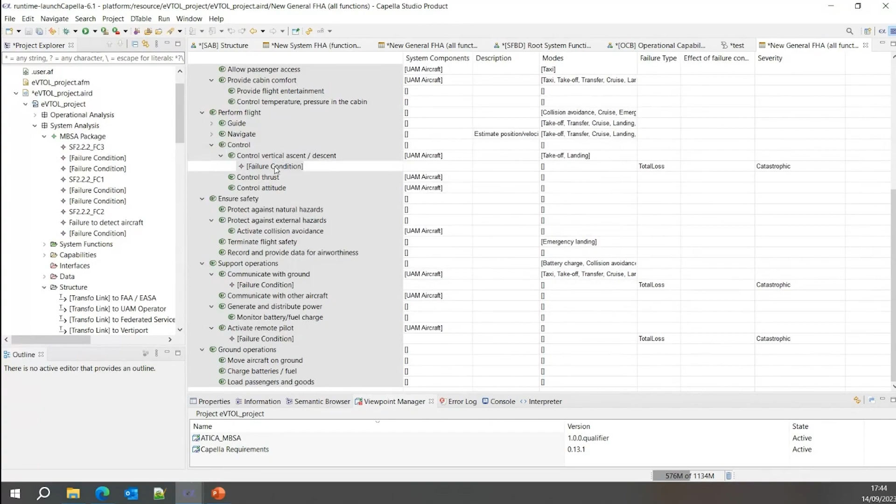So it's something that could be customized by the user. If there is a failure condition that is somehow damaging the whole navigation function, it will appear just under navigation. Or if the failure condition is to a more specific function, it will appear just under the parent function.

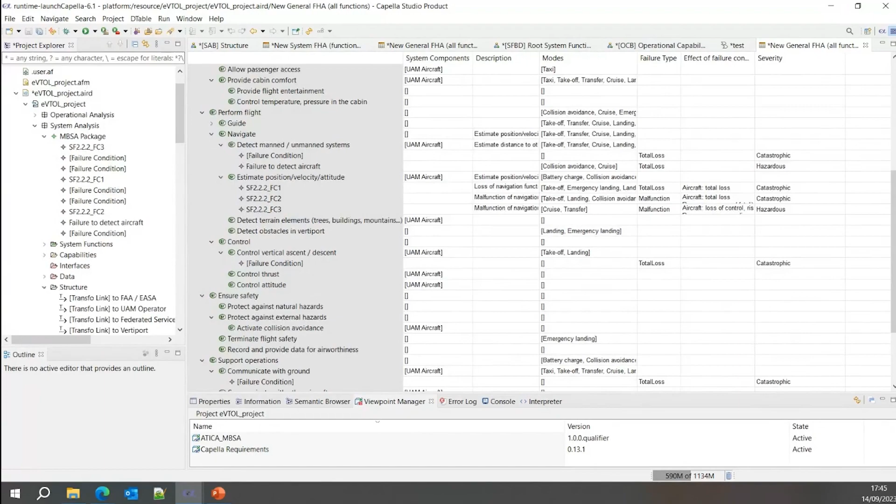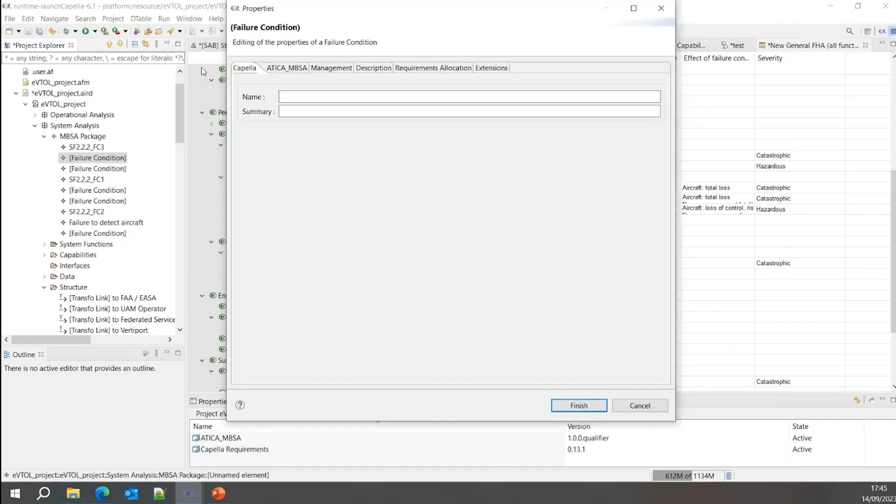Okay, next one is from Vincent too. Have you defined a process to ensure lower levels implement compliance to fulfill system analysis probabilistic requirements? Yes. So this is something that we are consolidating. I didn't present it today in detail. Can you share again the screen, Samuel? Yeah, that's okay. Cool. So here, I didn't enter into detail because it's something that we are still working on.

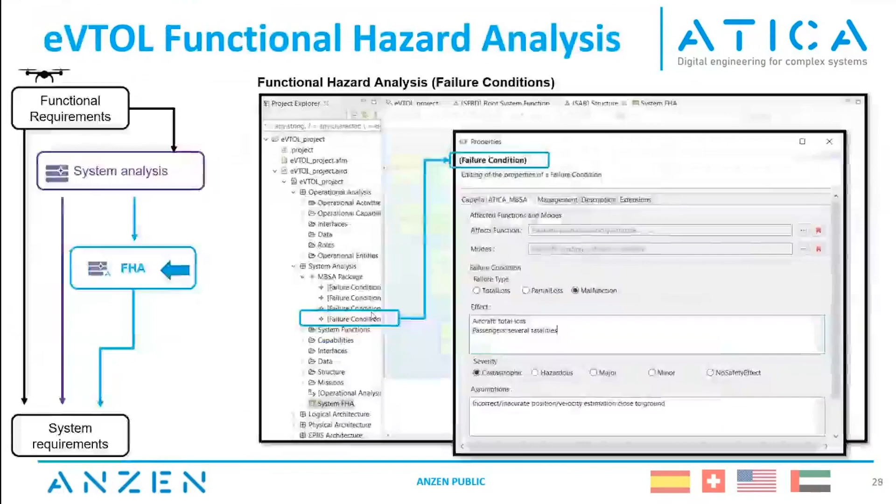But you see here that there is a field, failure refinement, that allows us to link failure condition to functional failure. And if I jump back to our safety meta model, which is here. Remember, a system function we can break down into logical functions and the logical function into physical function. We are doing the exact same process with the failure conditions. We can break down failure conditions into functional failures and then the functional failures into failure modes.

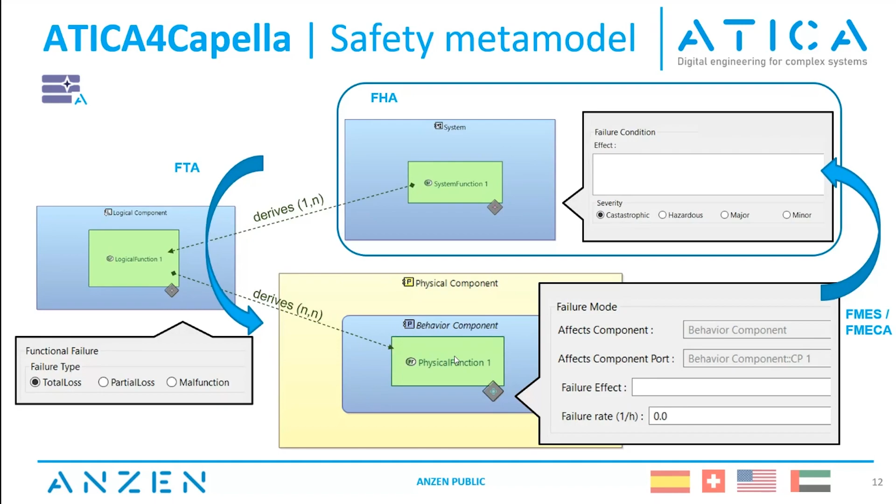And this is what allows us to propagate failures or to link failures across different layers of architecture and to have this holistic view of our system all interconnected, and that allows then to run the automated analysis through the fault tree analysis or the FMEA. Okay, thanks.

Okay, we have a kind of variation on this question. So, are you going to support FMEA and STPA? But we already answered this one. Yes. So for FMEA, you will see in the trial version that there is already an FMES, which is, let's say, a summary of the failure modes. So it allows to choose one component and to summarize the different failure modes that affect the component.

The next step is to implement the FMEA. It's something that we are working on. And as for the STPA, as I said, we are having this question left and right, so it's something that we should be jumping into as soon as possible, because clearly there is a huge need by the industry to implement this method.

Okay, and is it possible to associate a failure tolerance or a safety objective to each failure condition? Yeah. So for now, we are classifying the failure condition into catastrophic, hazardous, major, and minor, and we plan to link this with the requirement viewpoint in order to have a sort of library of requirements, which makes that when you create a failure condition that is, for instance, catastrophic, you have automatically a requirement that says which is, in this case, the safety objective or the probability of occurrence threshold of this failure condition.

For now, our classification of failures between catastrophic, hazardous, major, and minor is something that is fixed, but we are looking to different means of making something that could be customized by the user. So this way, maybe the user can create a table, create their own classification between catastrophic, hazardous, major, minor with different labels, and then associate which will be their safety objective for each of the layers.

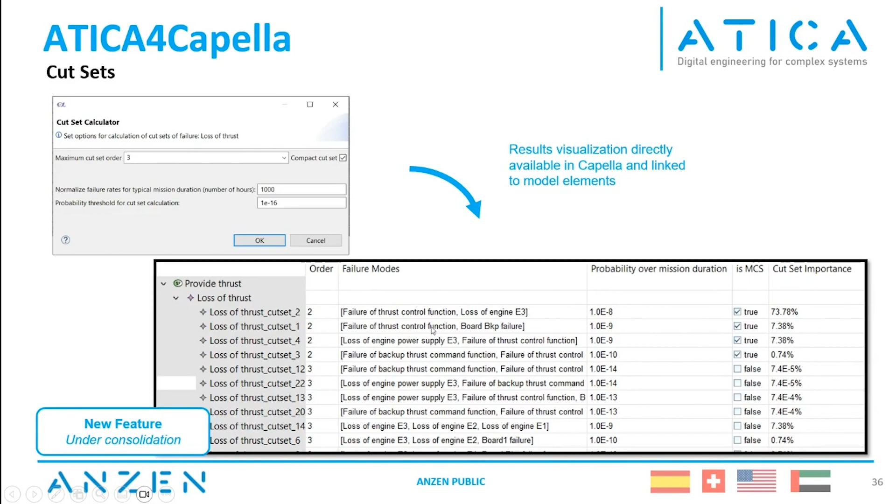And finally, the report looks this way with the failure condition on the left, the different cut sets, and the failure modes that are affected to the cut set. The probability, the aggregated probability of these failure modes, and then different control fields that allow to check the result.

Okay, and we received questions in the meantime. So is there a way to link the safety rankings to functions? Yes, so this is something that we are consolidating right now with the combination of ATICA for Capella and the requirement viewpoint. So our idea is that once we have created a failure condition and associated it to a system function, automatically we create a requirement saying if the failure condition is catastrophic, probably your function development assurance level for this system function is DAL A.

And this way we can automatically generate these requirements from the functional hazard analysis and speed up the process, and more importantly, ensure consistency between the work done by the safety engineer and the requirements that are exported to the requirements database.

Okay, and is the tool suitable to carry out system safety analysis as per ARP 4761? Yeah. So this is the main focus of our work. Right now we support functional hazard analysis. Soon we will support also the cut sets, fault tree analysis and FMEA. And more importantly, we are developing this tool so the documentation that is generated is fully compliant with this normative standard in order to disrupt as little as possible our potential users of the tool.